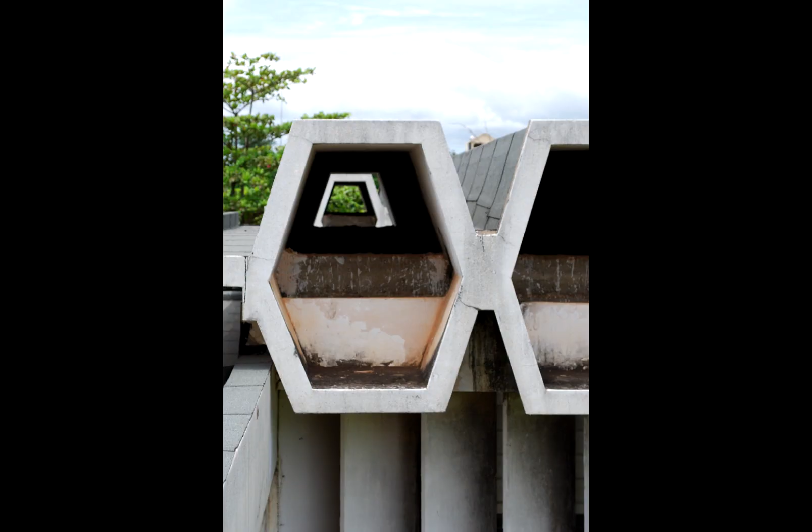"We must accept our loss," he said. "It will also be the loss for me here in Phnom Penh," he said in a letter to Vladimir Bodiansky, the engineer with whom he worked on the National Sports Complex. It was Bodiansky who wrote to Vann Molyvann in early 1965 to confirm that they would be the project leaders, with architects Jean-Claude and Claude Duchemin and urban designer Marc as their assistants.

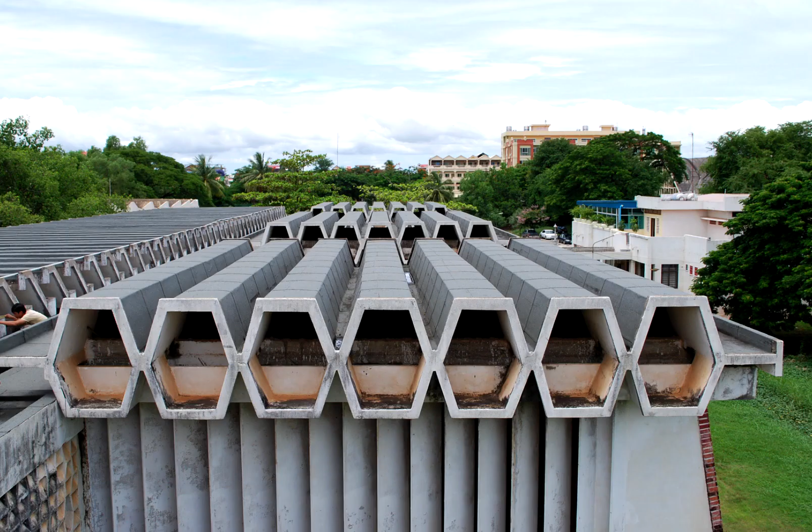On April 10, Vladimir Bodiansky received a letter from France's Town Planning and Housing Mission. Bad news, it said. Foreign Affairs cabled Phnom Penh last night to confirm the elimination of Vann Molyvann's project. Pretext: design not adapted to the program. But from the tone of my informer, it would appear that politics played a role.

On the same day, Vann Molyvann and his wife wrote to Vladimir Bodiansky indicating that they wished to leave Cambodia. The reason for this desire to move abroad remains obscure. What is clear is that Vann Molyvann was acclaimed internationally for the National Sports Complex completed in 1964, and that Vladimir Bodiansky tried to get him nominated as a United Nations expert in 1965.

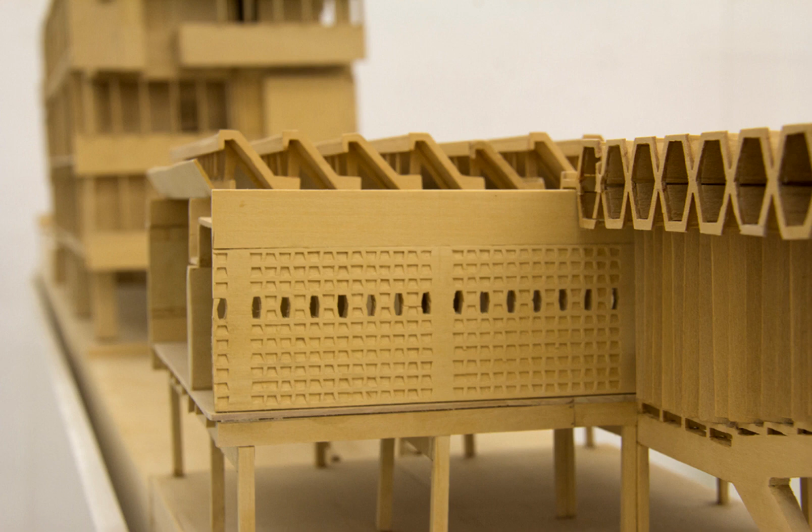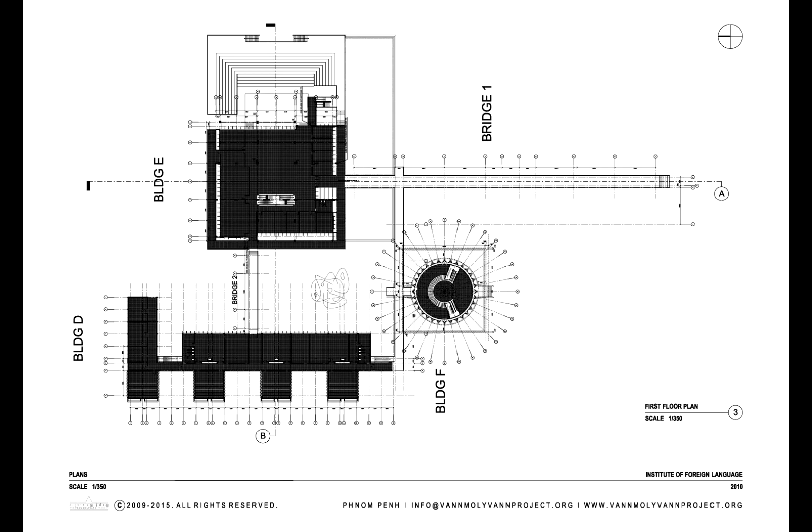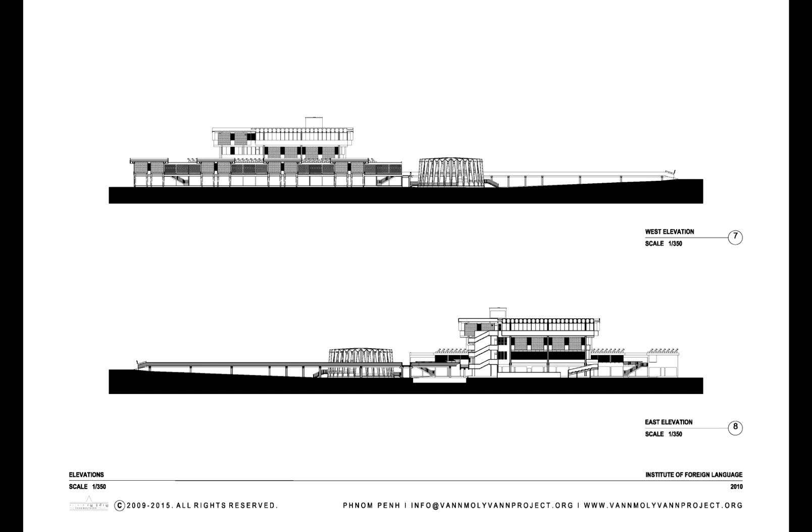Although Mondet apparently continued to work in Cambodia, Vann Molyvann's final design, inaugurated in 1972 after he left Cambodia, shares a number of points in common with the earlier design, a square main building and a complex of moats. But the final composition has exploded, with the main building, the library and other rooms expressing themselves independently, although free of the initial symmetry. It retains homogeneity, as the same building materials are used throughout and a footbridge connects the buildings.

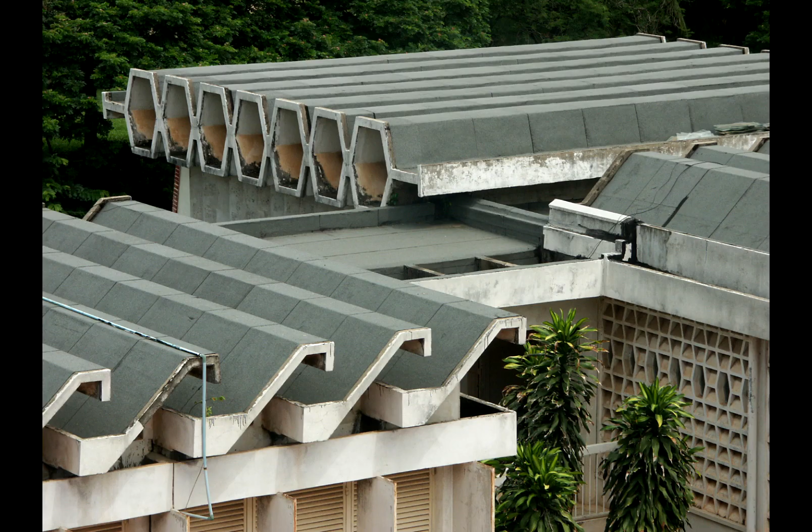Moats are everywhere. The entrance of what is now the Institute of Foreign Languages consists of a monumental bridge, complete with nagas reminiscent of Angkorian temples. If the site was restored to its initial design, the buildings would all be surrounded by water. All buildings are raised off the ground. The main building, which has a carport underneath, is like an inverted pyramid, each floor overhanging the lower one. This creates a strong geometrical effect and also reinforces light and shade in the facades, contributing to a strong sculptural effect, as if extractions and cavities have been made in a primitive cube.

It also has a reason. Each floor provides shade for the lower one. The reinforced concrete roof of the main building is an incredible coffered structure reminiscent of honeycomb. The walls, where they exist, are composed of diverse red brick panels, sunscreens and reinforced concrete in strong contrast both in texture and in color. The external staircase is a fire escape sculpted into the composition like those of Le Corbusier.

Inside the main building is an immense hall with staircases, balconies and columns with light penetrating indirectly from the facades. It is somewhat like the SKD brewery, with offices suspended around the central space, but far more bold and daring. The teaching labs are a fantastic composition of individual structures positioned on reclining columns and represent yet another experiment in roof composition. The connecting passageway is bordered with a wall pierced with holes.

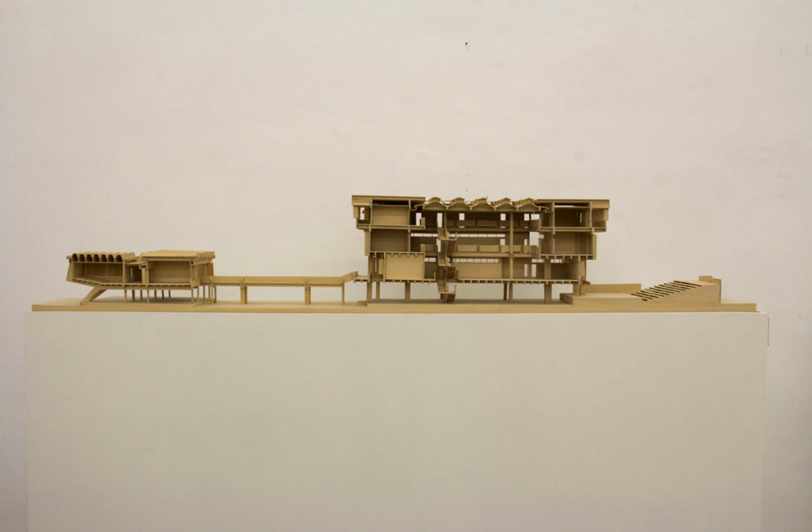Vann Molyvann said the small library was inspired by a Khmer straw hat. Its circular concrete roof indented with rays seems to be floating on a circular glass wall. Inside these buildings, light is filtered by the ingenious location of windows, so that one is never blinded nor troubled by intense contrasts of light.

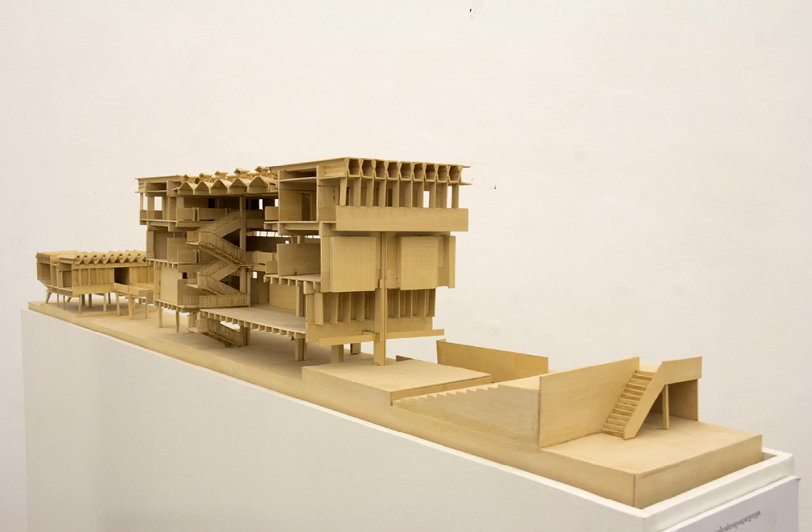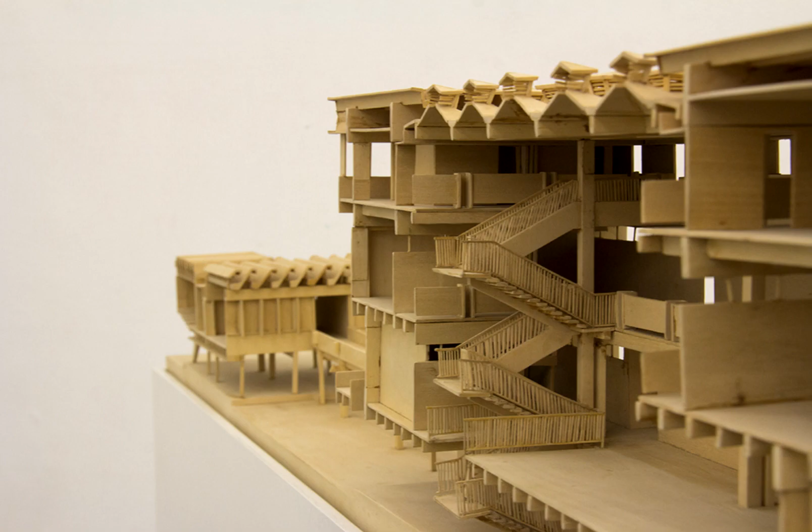This last work of his before Norodom Sihanouk's overthrow uses all the devices he developed over the years in responding to the Khmer, finding his own particular style. But here it is taken to such an extreme that one could almost qualify these buildings as new Khmer Baroque architecture. Barely 10 years separate this from the Council of Ministers, but they could almost be the work of two different architects. Vann Molyvann left Cambodia before the teacher training college was inaugurated in 1972.